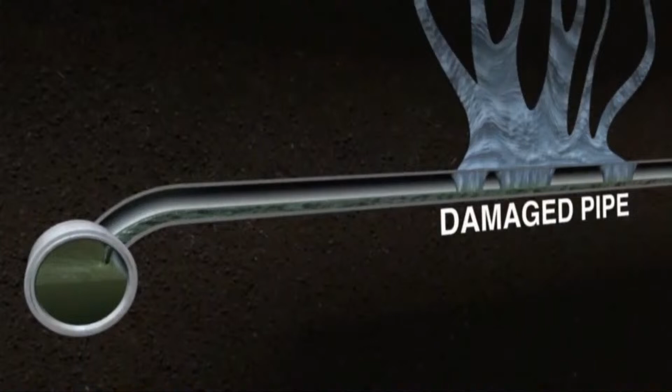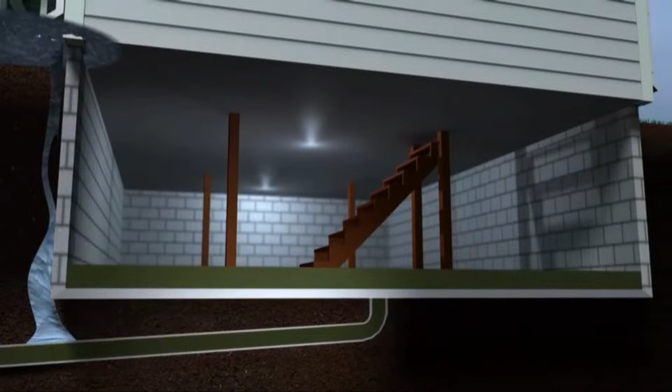I want to get started with a little video that explains what Blueprint is all about and why we're here. This is a look at what's currently happening in neighborhoods like Clintonville. If we get a lot of heavy rain, rainwater enters our sanitary pipes. As that rainwater fills up, it doesn't want to stop moving—it always wants somewhere to go. Our sanitary sewer system has built-in sanitary sewer overflows to prevent significant issues system-wide. Some of that water is sent into our rivers and streams; other times it goes back into a basement. Anyone here have a sanitary basement backup? We don't like to hear about that either, and this program is aimed at fixing just that. The question is, how are we going to do it?

The Blueprint Columbus program was created to prevent sanitary sewer overflows, and as an added bonus, we're cleaning and filtering the water going into our rivers and streams, making it better than before. Back in the early 2000s, the Ohio EPA showed up and said we were putting too much untreated water into the rivers and streams. We didn't like to hear that, so we had to come up with a solution. They issued us a consent order, and thus the Blueprint Columbus program was born.

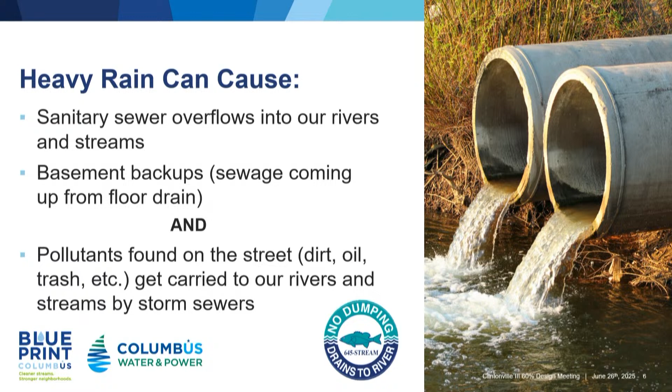Some of your neighbors to the north, in the northern sections of Clintonville, had rain gardens installed around 2018 to 2020, so the project is already well underway up there. This is a green, innovative solution for our separated sanitary and stormwater system. If you notice out on your street, there are two different sewers throughout most of Clintonville—storm and sanitary. Sanitary takes care of the stuff we don't want to talk about or smell. Stormwater takes care of the stuff that falls from the sky. Our goal is to keep those systems as separate as possible.

That video showed all that rainwater getting into the system. Instead of just building yet another tunnel, digging up more Columbus streets, and making more traffic headaches, the city decided to invest in green infrastructure, invest in your neighborhood, promote local permanent jobs to create and maintain our rain gardens, and engage the neighborhood—exactly what we're doing tonight with so many faces out here, so you can be a part of this process.

Here's a look at where we're located. It's tough to see on the map, I understand. Clintonville 3, the neighborhood we're in tonight, is that southern light green box. If you're familiar with the map of Columbus, that would put us just north of the University District. Our project areas span all the way from the north of Clintonville, west to east from Hilltop over to James Livingston, north to south from Clintonville down to the near south. These project areas span over 18,000 acres of neighborhoods, some in construction and some that will be.

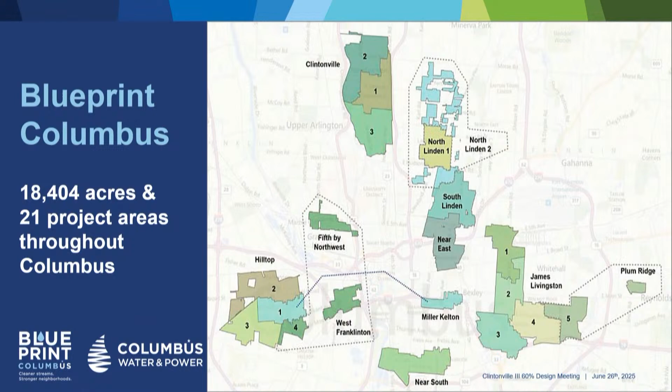So where you see breaks in that map, it's very intentional. The biggest break we see is if we look south of Clintonville towards the university and downtown, there's a completely separate sewer system there. It's combined—all of the stormwater and all of the sanitary water are treated together and filtered right down to the water treatment plant. The rain gardens wouldn't do what they do here in Clintonville. The green infrastructure would not be as big of a deal as it is in those neighborhoods.

So we take a big 30,000-foot view at exactly what Blueprint does. We have 4 separate pillars, and I'll dive into these individually in just a minute, but they are lateral lining, sump pumps, green infrastructure, and in some cases, roof water redirection. The column there to the right, the green infrastructure, is I'm sure what many want to hear about tonight. Those are our rain gardens, our pervious pavements, our bioretention basins.

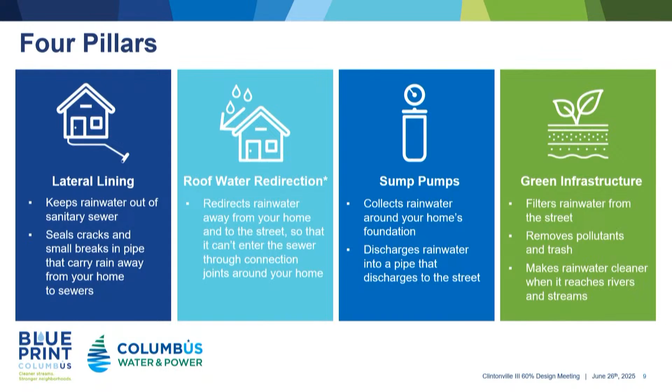So let's take a quick look for those who weren't aware of all that Blueprint offers. This is a good time to take out those notebooks and jot some things down. The two things I'm about to show you come to you as project area residents at no additional charge. I don't want to say free, because you're paying water utility bills, hopefully—if you're behind on your utility bill, just don't walk toward the back of the room too quickly, because we'll know. But the lateral lining is a very successful system.

It's basically our bread and butter here. This is what we really like to see. If you're not familiar with the term sanitary lateral, that is the piece of pipe that goes from your home to the main sewer. In most cases in Clintonville, that's going from the front of your home out to the sanitary sewer under the street.

What we are doing is an innovative solution. We are creating a new pipe inside of the existing pipe that connects your house to the street. Why are we going to do that? Back to that first video—the roots, the dirt, the trees, everything that crumbles those pipes up. We have found a way to line this from the inside out using a resin and basically a PVC-like material.

Everybody now is going to look at me and say, wait a minute, you're going to dig up my yard, you're going to put a new pipe in. No, we're not. We are going to go from the manhole closest to your house. We're going to inflate—actually, the first thing we're going to do is put a camera in there, clean it out, and look and see what it looks like in there and if it can be lined.

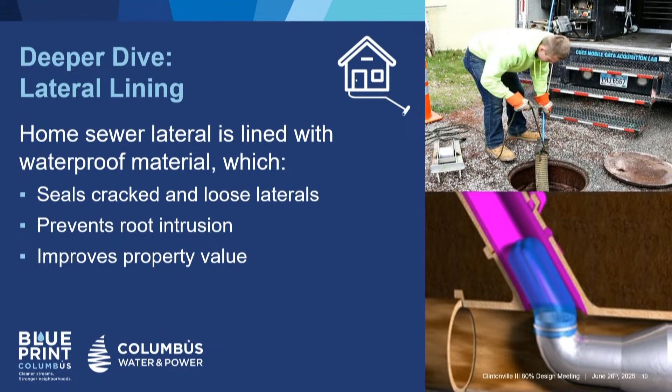If everything looks good and we can get our material in there, we're going to go right back from that same manhole with another crew. They're going to come in and inflate this thing in less than a day. It's going to stick to the pipe for a couple hours and dry, and you're not going to notice a difference other than seeing fewer water backups in your neighborhoods. It's a byproduct, it's a benefit—it's not the total purpose of Blueprint to eliminate all of our flooding.

So how many people in this room have a sump pump in their home or basement? Yep. How many people have a sump pump that is not working? Okay, if you didn't raise your hand yet, or if you raised your hand because your sump pump is not working, you also qualify for a sump pump through the Blueprint program. We are installing those as we roll through areas, and I will have a sign-up code for you momentarily. That is, again, offered at no additional charge.

So the two things I mentioned—if you have neither of those right now, if your lateral has not been lined by another company, or you're looking to get a potential sump pump—ballpark, you're saving yourselves anywhere from $15,000 to $20,000 that you can then claim, hey, I did $20,000 worth of work to my home, when you turn around and sell it in this crazy housing market, right?

Because that's what everybody's thinking about. All right, big time now. This is what we're talking about tonight.

Green infrastructure, bioretention basins, rain gardens. So what is the goal of the green infrastructure?

Leaves, debris, nitrates from fertilizer, soaps from car washes, oil off of cars, you name it, flows down the street. Without the green infrastructure, all of those pollutants are going to go right into the storm sewer system. And because it's a separated system, remember, we've got those two pipes right now, the stormwater is not filtered before it goes out into the river, so all that goes right out.

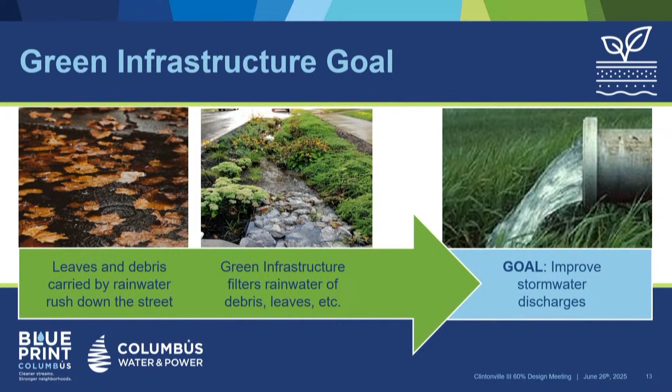By adding our green infrastructure, we're doing two things. We're slowing the water down so that it does not overextend the system during a heavy rain event, and we're cleaning all of those pollutants out of the system so that it makes cleaner water on the other end.

Here's a couple of examples of some of our current bioretention basins. I want to point this out really quick: if you go to blueprintneighborhoods.com, there is a self-guided rain garden tour. Great for not a hot day like we've seen lately, 95 degrees plus, but if you want a nice walk through parts of Clintonville and North Linden, or drive it yourself, you can see each of these types of bioretention basins and permeable pavement in action.

To break this down a little bit, on the left-hand side of the slide presentation, the behind-the-curb rain gardens are what you are going to be able to expect in your neighborhoods. If you have a basin that was marked by our engineering staff near your front yard, in part of your front yard, these are the types of basins you can expect to see. We have the bump outs over there as well.

These are a conversation starter for sure. Our bump outs, I've heard it. I've held the phone about this far some days. I've looked at the email screen a couple times before responding some days. Hear me out for a second.

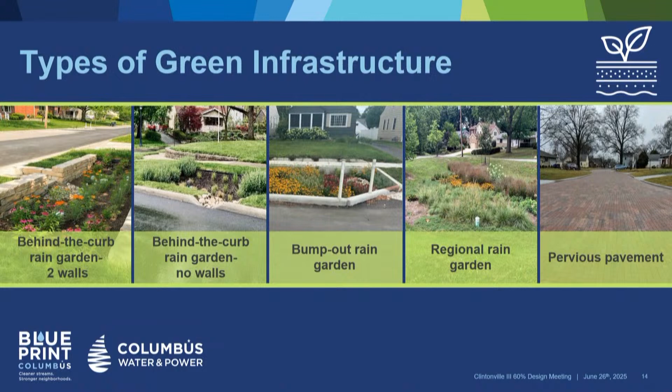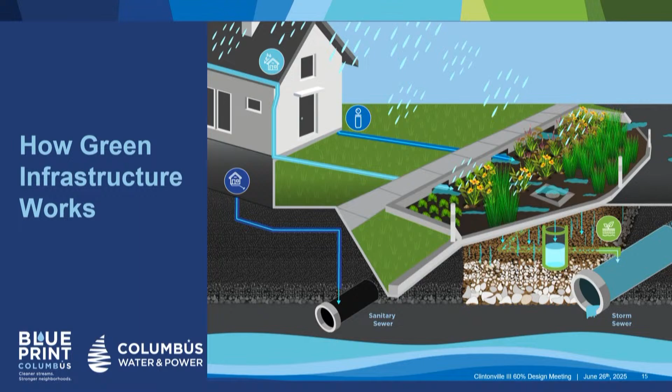So, water comes off the street or out of the house or out of the sky. It's filtered through the rain garden, and you can see down there. And again, if this is difficult to see on the screens here, we'll post the slides and the video tomorrow morning so you can take a closer look. You see there how there's some mulch, some biosoil, some rocks, all of that filters down, and then you see we have that little animated connection there to the storm sewer. That is our process in action, bringing everything together to filter that water.

Everybody here tonight is part of the 60%, part of our detailed design process. We want your feedback, we want your input. We know those trees on the right-of-way line and in the neighborhood are important to you. Can we fix every problem? No, we cannot. Can we try our best to come together and reach a happy medium? Absolutely. We want to hear your feedback. I have a whole room of our design engineers who will be at individual tables later tonight to take notes and listen to what you have to say.

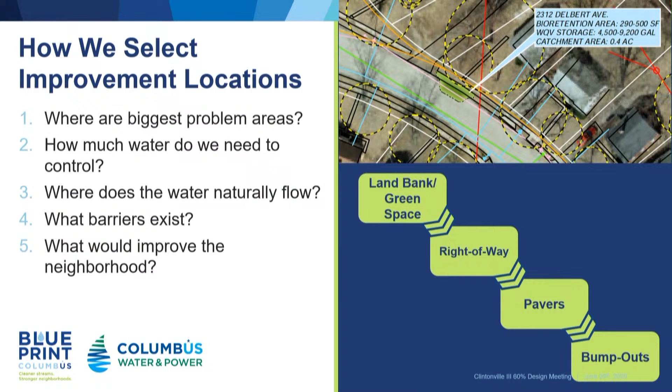So again, my general project updates are this: right now we're at 60%. That means we still have 40% of design to go. Some of those basins marked in yards today will change in shape, size, or location. Some are going to disappear altogether, because we are looking at stormwater modeling all the time. Some are not going to change, so there will be some impacts. We'll try to minimize that as much as we can.

Here's a fun one, I know it. I know this is why some folks are here, and I've heard it. I've talked to folks when we were out a couple weeks ago marking the basins, and the thing that continued to pop up was: you're not maintaining the rain gardens. I'm going to be real honest.

We got hit with a 1-2 punch. We had an incredibly hot summer and fall last year. A lot of our plants, simply put, even though they're native plants to Ohio, did not survive that heat.

On top of that, we get into the beginning of this year, and we have a contract issue. I want to explain what I mean by that. The city of Columbus has an incredibly robust policy for how we spend public money. This is to protect the money you entrust us with and ensure we're doing things in a transparent fashion. When that happened, outside the control of Blueprint Columbus, a previous maintenance contract was canceled. We are now in the home stretch of adding contractors to that street.

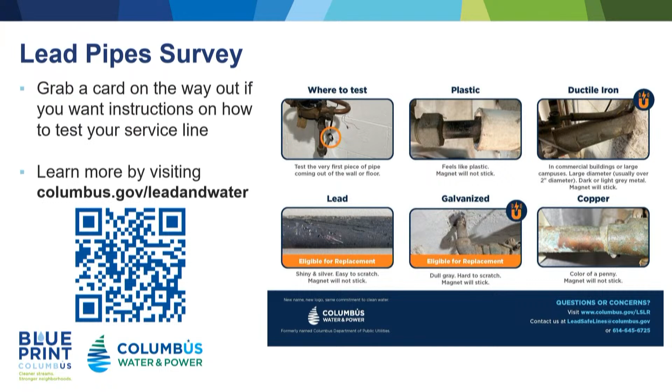My colleague Hannah Mullen has a table set up in the back outside the sanctuary tonight. If you have individual questions, if you want to know if your property has already been surveyed, maybe you just moved in, ask her. She's got a tablet and computer and can look it up for you. If you happen to know, without a doubt, I've got copper, I've got plastic, and you are on the list, please let us know that as well, and then we'll stop bothering you and coming door to door. That's all for Blueprint 101. I'm going to be here for questions after we get through the rest of the presentation.

I'm going to turn the microphone over to Rachel right now from Stantec, and she's going to talk about an update on the Walhalla Ravine, which is also located within this project area.

Thank you. Here you go. That one. Can everybody hear me okay?

Hi, I'm Rachel Mullaney, project manager for the Tulane-Finley sub-project area. Jihan's going to go through the sub-areas within Clintonville 3 next, but I just want to take some time to talk about another related project. It goes hand in hand with Blueprint but is separate — the Walhalla Ravine restoration.

As part of that project, we are proposing to restore Walhalla Ravine by stabilizing eroding banks, proposed to occur between Clinton Heights and Longview Avenue. The goal is that when we stabilize eroding banks, we prevent sediment from going into Walhalla Ravine and therefore the receiving stream, the Olentangy River.

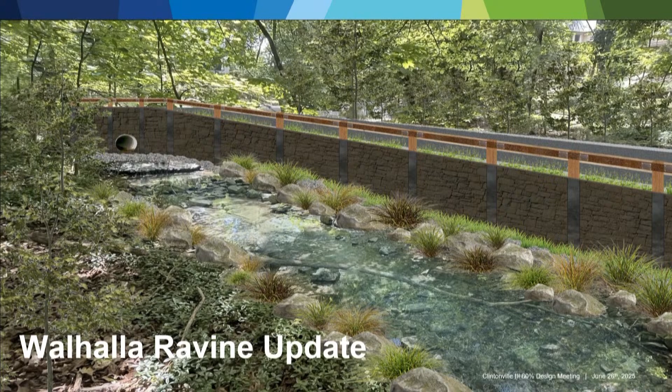This helps water quality in the Olentangy River, and it's related to Blueprint because we're able to quantify that water quality improvement from the stream restoration, and therefore put fewer rain gardens in the neighborhood to achieve that same level of water quality improvement.

As we go through these next slides, you'll see the difference between the 2022 design and the current design. You'll notice a lot of the rain gardens have gone away, and a big part of that is due to the Walhalla Ravine restoration.

The update is that our plan has gone through all city approvals and all environmental permitting — Ohio EPA, U.S. Army Corps of Engineers. Where it stands now is we're in the easement negotiation phase. The city has to have property access agreements with the property owners in that area, and we cannot proceed with getting a contractor to do the work until all those agreements are in place.

So the design is complete, we're ready to go, we're just waiting on those last couple easements to come through for that to move forward. Oh sorry, there's the slide.

Another part about the Walhalla Ravine that maybe we haven't talked about yet is invasive species removal. We had a biologist from our firm walk up and down the ravine, and we've identified a number of invasive species — namely mostly honeysuckle, some tree of heaven — and we've located those accurately on public property. We've also taken note of the ones visible on private property, though we didn't go onto private property to locate those; sometimes you can see them from the street.

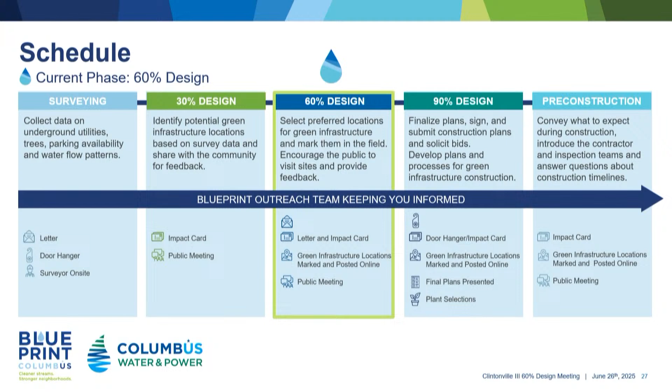Regarding the project timeline, as Cameron explained, this project includes several pillars. The first pillar is the sump pump. This work started in this area in 2022 and will continue until 2026.

The second pillar is the green infrastructure, which will start in 2026. The last pillar is the lateral lining, which will start in 2026 and continue until 2029.

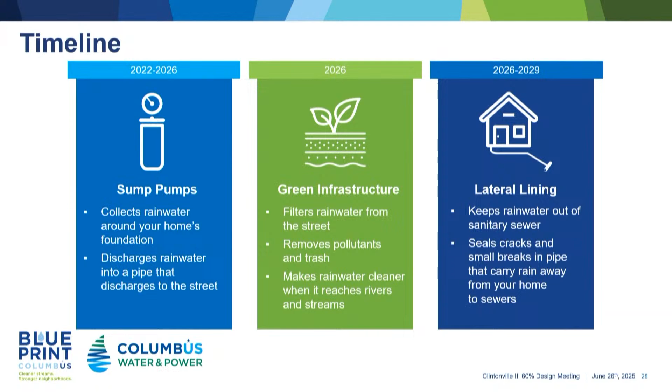After we received feedback from the residents and conducted more analysis and studies, we made some changes since then, different from what we proposed in 2022. These major differences are four.

The first change we made is we excluded Doris Weber area from the green infrastructure. However, we will keep performing the lateral lining and the sump pump as we planned for this area.

The second change is the roof redirection program has been suspended because we found it has a negligible impact on this project's goals. The third change we made is no pavers...

...and also no bump outs will be installed in this project.

The fourth change is we included gray infrastructure. That means we will upgrade the storm sewers in this area in different locations to address the flooding issues found in this area.

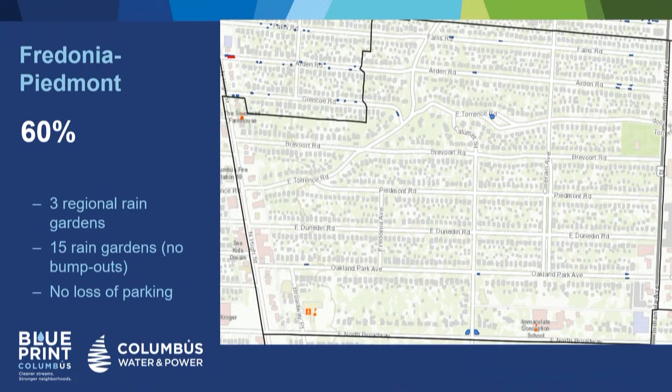In the 60%, we decreased the number of rain gardens after the Walhalla Ravine restoration work, down to 3 regional rain gardens and 15 rain gardens, with no loss in the parking lots in this area.

Here I want to highlight the median in Torrence. Initially in the 30% design, there was a plan to install 2 regional basins in this median.

However, after community engagement and hearing the feedback that this median is actively used by the residents for activities, gatherings, and concerts, we revised the design.

We will now just have a small, tiny rain garden at the corner of this median, in the northwest corner. So now we will have minimal impact on the community activities.

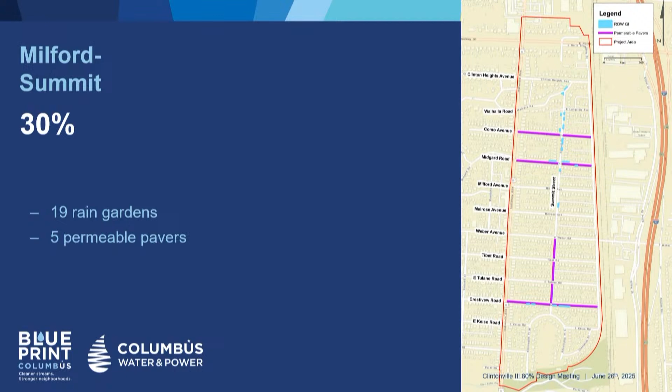Here I will go through the Milford Summit area. The 30% design included 19 rain gardens and 5 permeable pavers. The change in the 60% is 13 rain gardens, with no pavers and no loss in parking.

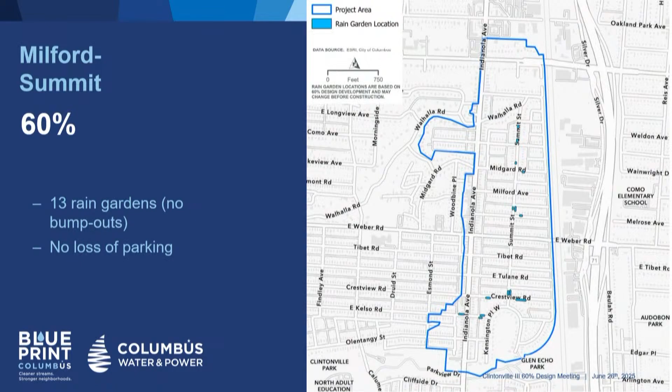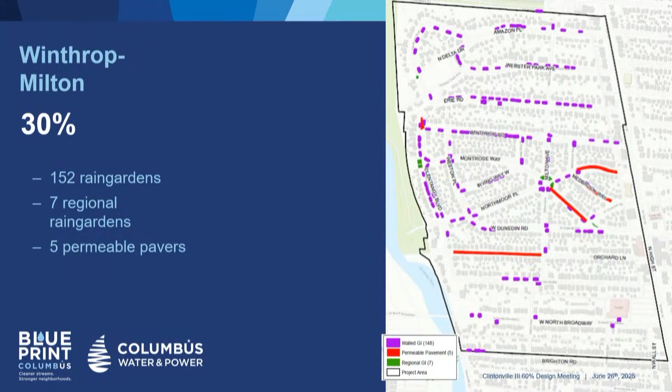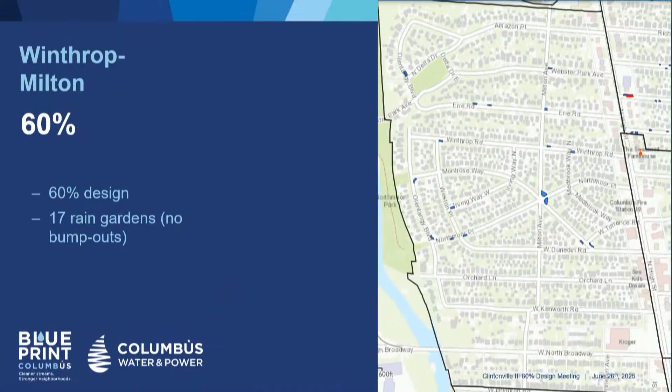Winthrop Milton area: the 30% included 152 rain gardens, 7 regional rain gardens, and 5 permeable pavers. After the Walhalla Ravine work and revising the plans, the 60% will include only 17 rain gardens. There's also a rendering prepared to show before and after in several locations.

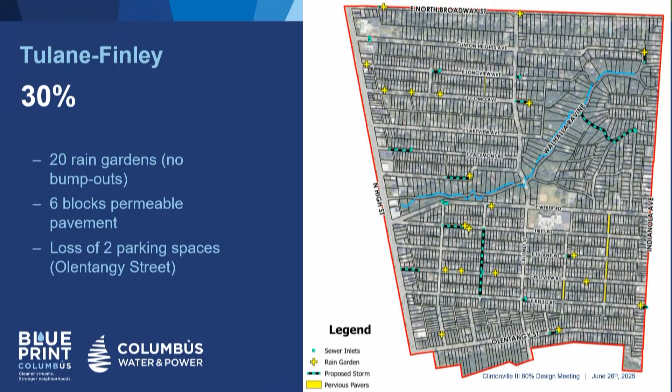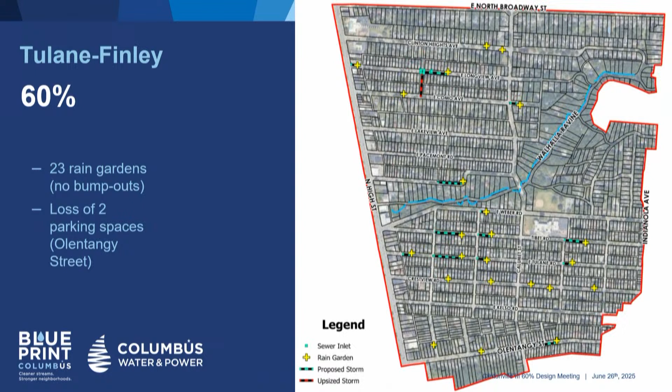Tulane-Finley: the 30% design included 20 rain gardens and 6 blocks of pavers, with loss of 2 parking spaces. The 60% design included 23 rain gardens, no pavers, and still a loss of 2 parking spots in this area.

Here I will hand it to Cameron for Q&A. Thank you so much, Jahan. Isn't it cool how we got all of you to stand right there on the island and get a picture you didn't even know was going to happen?